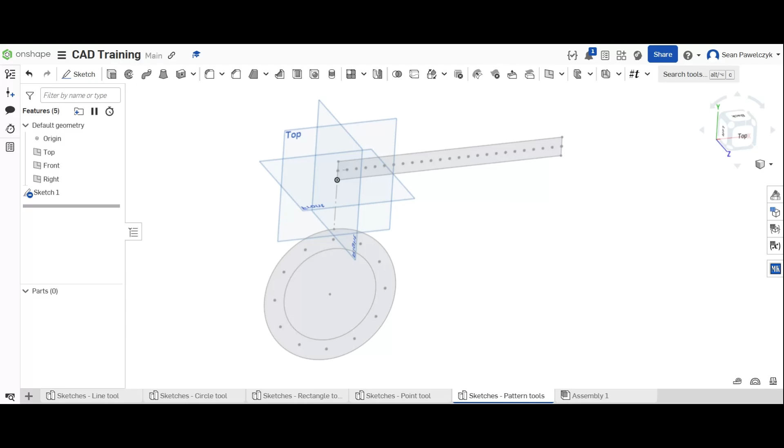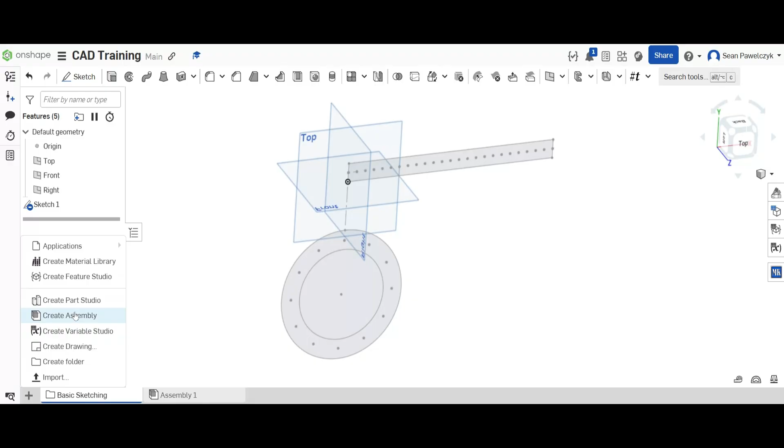All right, y'all. I think you all have basically graduated from basic sketching. We've mastered all of that. So we're actually going to move on to extruding things today.

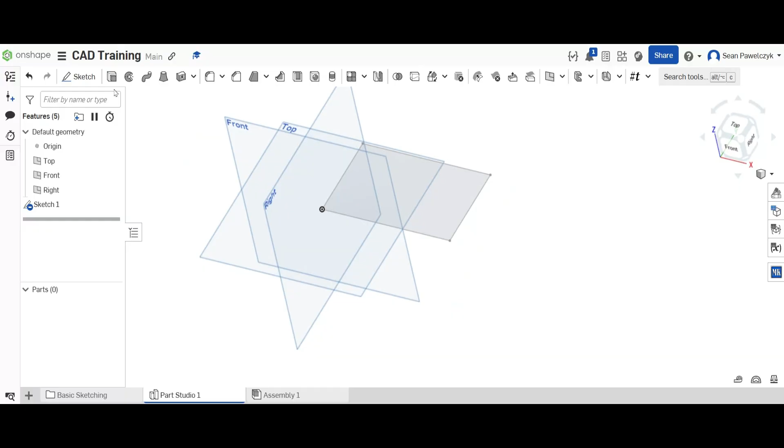What we're going to do is create a really quick sketch of something I want to extrude. Let's keep it simple and just make a rectangle of whatever dimension. We're going to use the extrude tool today, and the keybind is Shift E. Let's do exactly that.

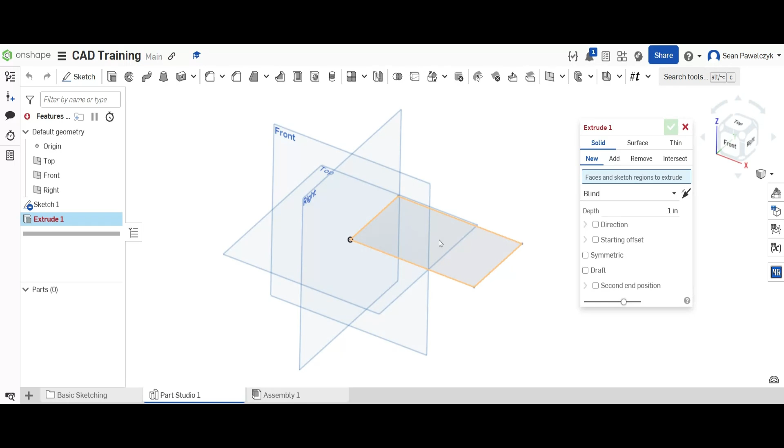Whoa, a whole new panel just showed up. Right now it's asking for faces and sketch regions to extrude. There's a few ways we can go about this. We can select right in our workspace on this rectangle we made, or we can just select the entire sketch itself, and depending on what you want to do, these will sometimes do totally different things.

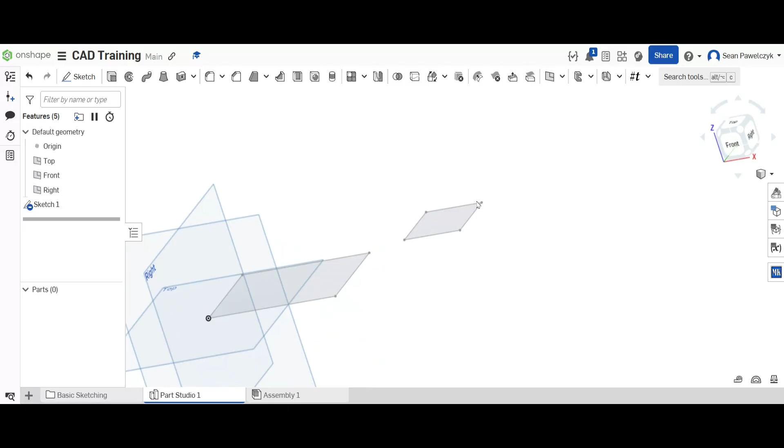For example, let's add another rectangle off here and do our extrude again. This time, look what happens when I just click the rectangle - it will only select that rectangle. If I want to include this one too, I have to select the other rectangle as well. But I can do this all in one step if I just select the sketch right here, so I can do two at once.

There's some panels here - by the way, we're not going to go into surface or thin ever, don't worry about those, make sure you're always sticking on solid. We have some other panels here: new, add, remove, and intersect. When it's your first time making an object, just stick to new.

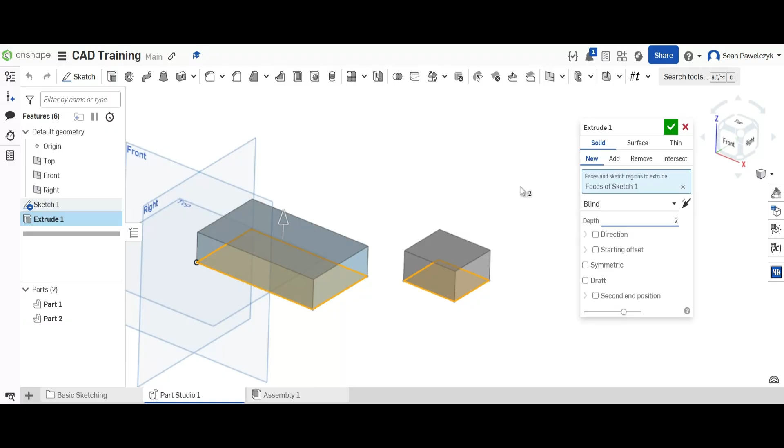Here we have two little boxes. I don't want it to be 1 inch, I want it to be 2 inches. Okay, perfect, so we've got 2-inch tall cubes here.

Let's create another scenario here - I'm just going to make this a little higher. All right, so it looks like we got a little Walmart in the house here or something, I don't know, but we have two little 2-inch tall rectangular prisms here, though this almost looks like a cube.

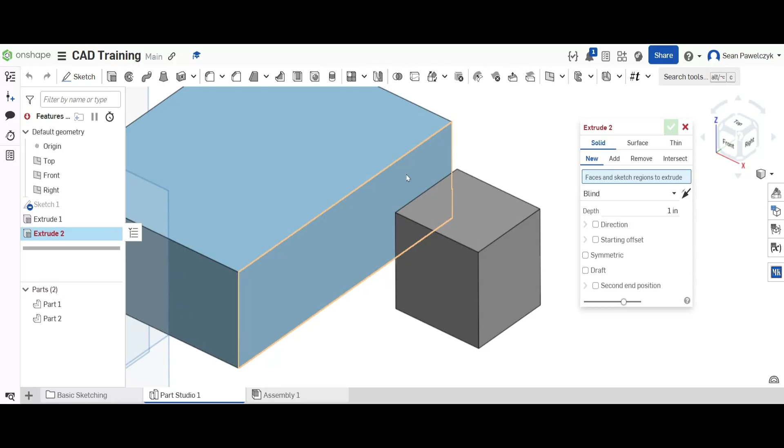This time I'm going to make another extrude, and I'm actually going to extrude from this face, making it longer. Before we were just doing a blind extrude, so it doesn't really know where it's going besides going 1 inch in depth. But you can actually change this dropdown to up to next, up to face, up to part, and through all - through all will go through basically everything.

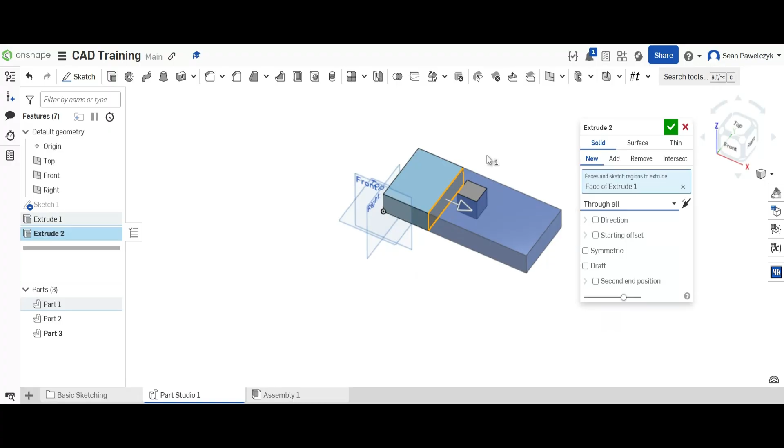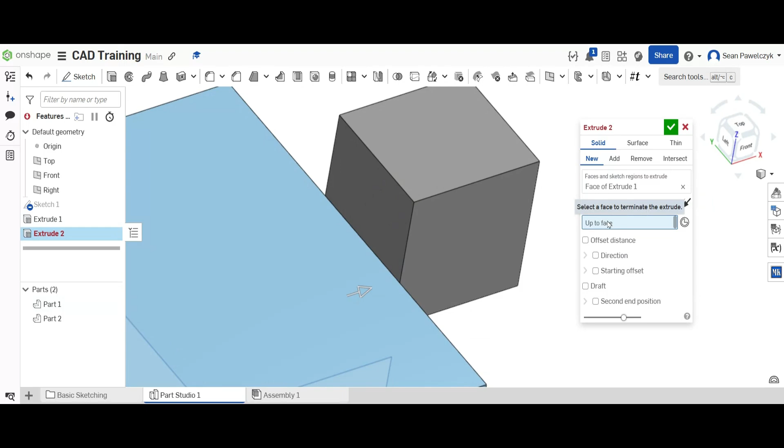But you usually don't need to use that one. Up to next... don't worry about that. Up to face is what I like to use a lot - it's going to ask you for a face to use, so let's use this one right here. It's going to create a new extrude up to that face of the cube.

What does add do? Here we have an error because it doesn't know what it's adding with. You might think that would be clear - oh, I clearly want to add from the face that I just sketched from - but no, we actually have to select. So we have the merge scope here, and it's already highlighted, and we just click on the object we want to use.

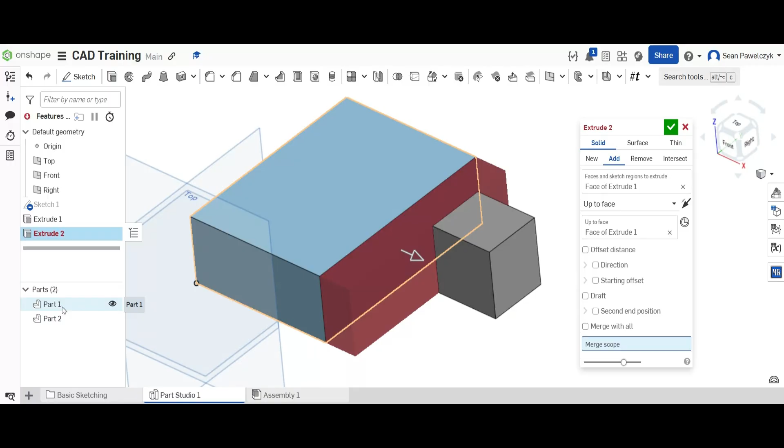If you notice down here, we have the two parts here, so we can actually select from here if we like, or we can just select directly onto here. I'm just going to select from here, and it'll actually merge with this cube here.

What if I want these two? So here's what we have - we have two different cubes still, but this one's just up to the face of here, so they're both kind of flush, per se.

What if I wanted these two rectangular prisms to just combine? We would actually do merge. There's two things you could do - you could either add this cube into the merge scope, which will make it into one part instead of two, and you get this funky little prism here.

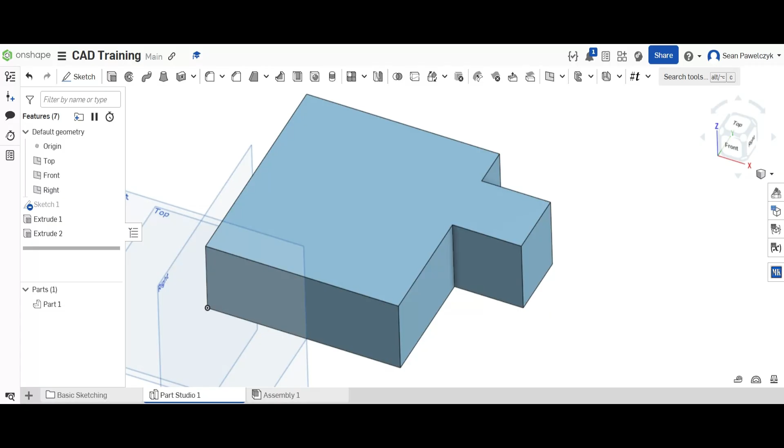Or you can go back in here and merge with all, and that might be useful when there's a lot of different parts and you just want to make everyone combine.

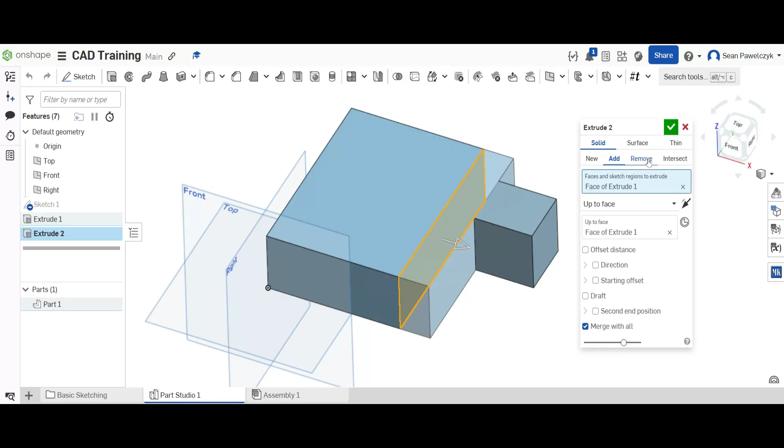That's a basic little introduction to extrudes, but let's look into remove also - that's also helpful. Let's say I'm going to make a sketch on top of here. Actually, let's see if I can use the little mate thing. Perfect, so I created a sketch on top of here, and let's say I just want to make a hole, like a few holes right here.

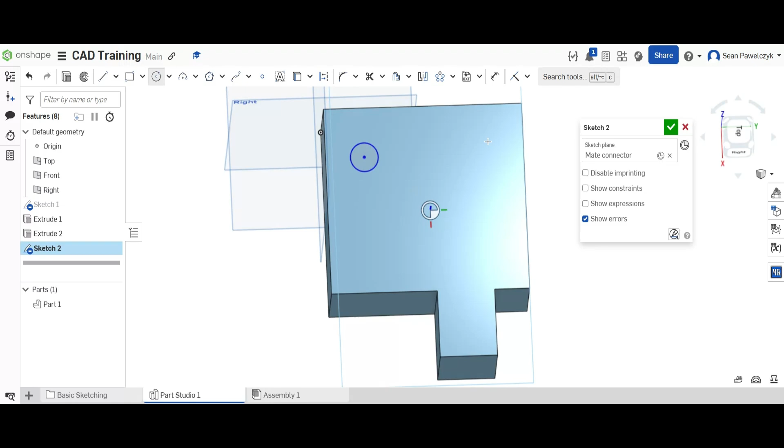This might be a good opportunity to use the circular pattern or linear pattern tool if you wanted to make the holes, or the point tool if you'd like. But we have our sketches here - these are the holes I want to cut out, kind of like we want to Swiss cheese this thing.

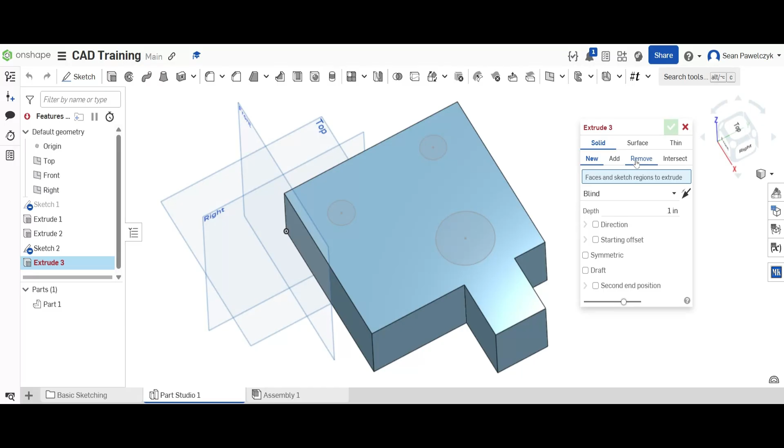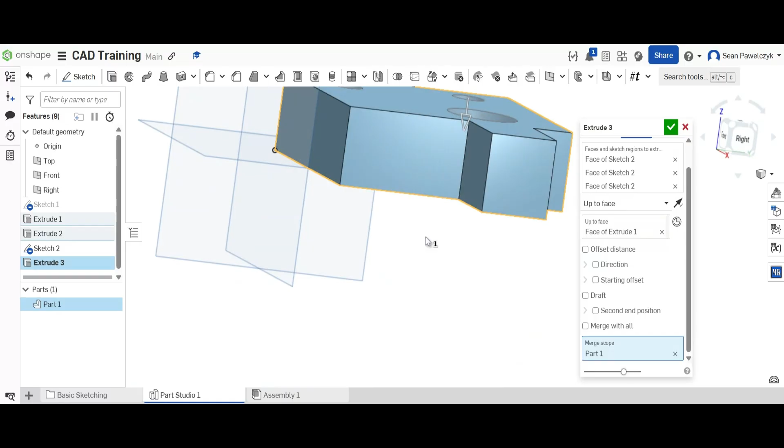So we're going to go back, Shift E, we're going to extrude, but this time we want to remove, and the sketch regions we want to extrude are these holes or circles we created. Right now it's just blind, it just goes down 1 inch - that's okay, but I want it to go all the way through. So we're going to do up to face, and use the bottom face here, and we just Swiss cheesed this entire thing.

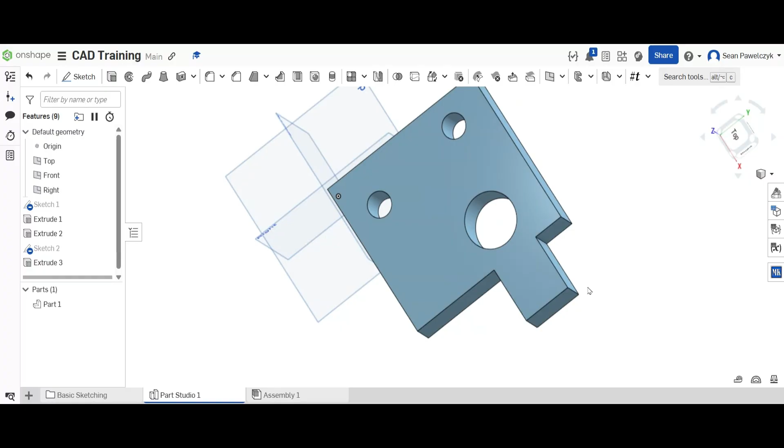So we've got this pretty odd shape here, but I bet you can already start to imagine how the extrude tool can be very helpful in the design process. That's a pretty comprehensive introduction to the extrude tool, but we'll get into it much more later.